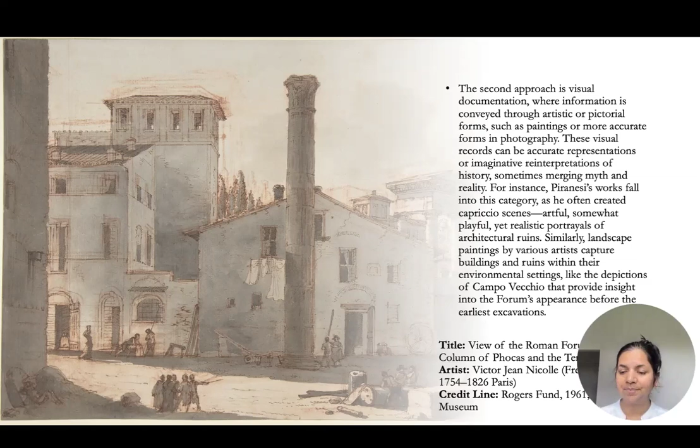The third form, and the form that actually is relevant in our case of work, is documentation and a focus on the work that is architectural drawings, a tradition that flourished from the Renaissance through 18th and 19th century. During these periods, many architects traveled, for example, to Rome, and as part of their training, visited sites like the Roman Forum to study ancient ruins.

By closely examining these monumental structures, architects gained insight into the assembly, form, proportion, and composition of temples, and often significant buildings from antiquity. This knowledge was essential as there was limited material available beyond Vitruvian treatises to examine and guide architects on the principles of ancient design.

So basically, what they would do is they would try and get a copy of Vitruvian work. They would examine and understand the proportions of study that were done during this time, and then they would actually produce them in the form of line drawings that were capturing on site the information that was to be collected.

And so what it did was it trained the eye with proportional composition that was written in the theoretical text of Vitruvius. So Vitruvius formed the earlier basis of how proportions need to be examined, and then architectural line drawings created the understanding of how these proportions were actually articulated within building design. And the combination of these two allowed for a much better understanding of how measure drawing worked.

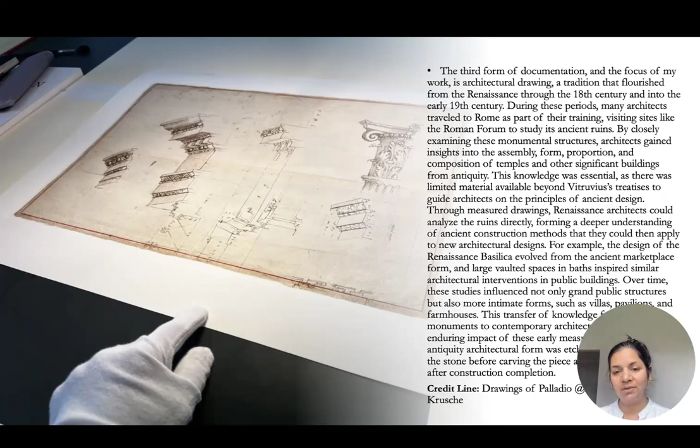Now I'm going to briefly describe Dharma Lab, which is basically digital documentation of World Heritage Sites. It was established in 2006 with the goal of digitally documenting World Heritage Sites, with the intent of helping the conservation efforts record their current state and generate new insights into their condition and histories.

Dharma Lab specializes in revolutionizing the field of documentation, leveraging innovative methods to achieve unparalleled precision and depth. Founded in 2006, it has over 18 years of fine-grained detailed data with up to 1 millimeter accuracy, and it allows, for example, in the case of one of the projects, which is the Roman Forum, for huge amounts of new insights into the site than previously available.

Over recent years also, we filled a unique niche in pioneering approaches that combine large-scale surveying techniques and cutting-edge scanning technology, including some of the work that I will be presenting here. NASA's principal work has been applied to some of the efforts that Dharma is doing, for example, the use of some of the technologies that were used in the Mars rover mission. How does that work with documentation? Well, that's what we're going to find out today.

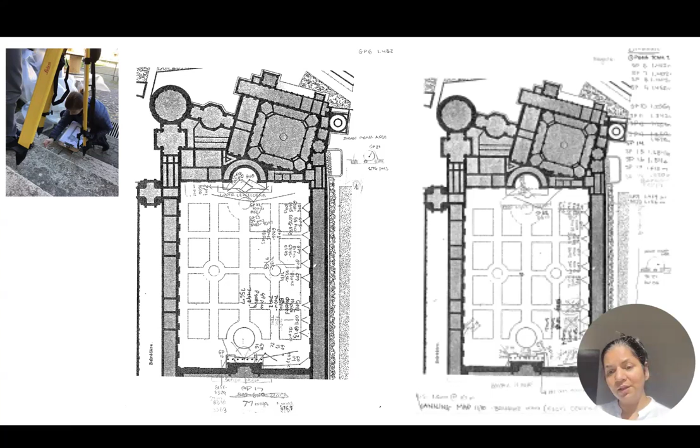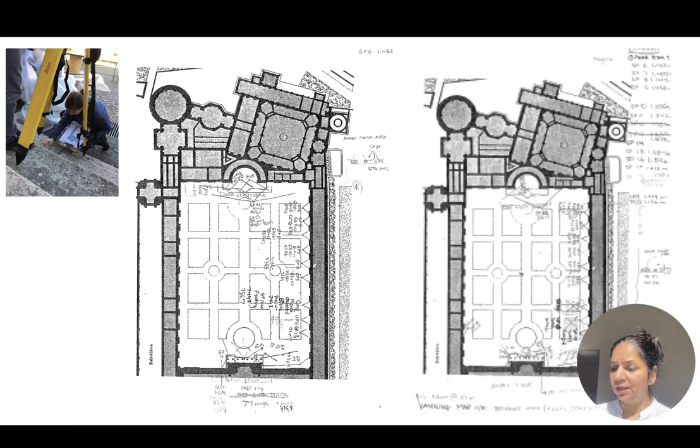Preliminary site visits are conducted to examine the terrain. So additionally, we also look into a preliminary site visit, at least one if possible, so one can get a sense of the terrain and visibility of specific monuments. For example, in the Forum project, this was an extremely difficult terrain, which is not the case in the Belvedere project, where the site is much more stable. And so at the Forum, we have to understand where we are going to place our instruments and what is the visibility between the terrain and the specific monuments on site to create a detailed survey.

Let's go to on-site work now. The on-site phase is the most intense and crucial period of the project. It requires a high level of coordination and ensuring that all team members have the necessary permissions to access the site. The site survey is conducted daily from sunrise to sunset over a period ranging from 10 to 30 days, depending on how big the terrain is and what needs to happen. It's typically the shortest period compared to the pre-site and off-site work, but it is most intensive in its manner of recording and information collecting.

The team is divided into groups. The survey is conducted by creating teams that are divided into groups working, according to the pre-site planning, on which instruments and what locations. Each evening, the collected data in various forms is cataloged and saved into a database to ensure ease of post-processing and quality control.

So for example, here you can see we are looking at 5 different techniques that we use on site. On site, we examine the historic documentation that we have already brought with us, and on that, with trace paper, we create field notes. And then beyond that, we use 3 tools. One is photogrammetry, the other is gigapan technology, and the last one is 3D scanning.

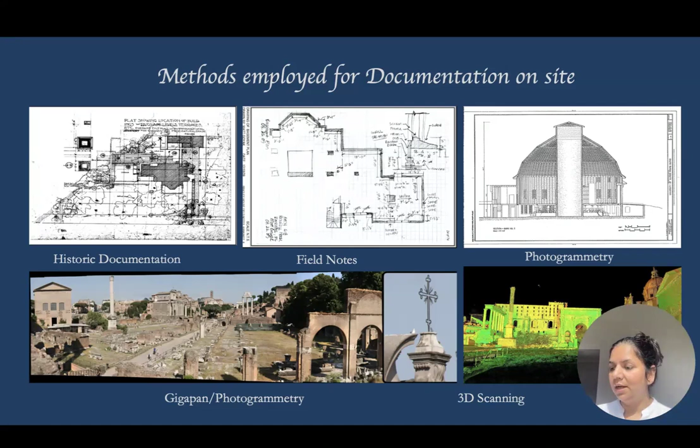The scans are typically made at a resolution of at least 1 centimeter by 1 centimeter accuracy. So let me explain to you what happens with the different tools that we take into consideration. This is, for example, 3D scanning technology used with 3D scanners. Today in the field, you have many commercial sellers that work on this technology and have raided the market with multiple different scanning techniques.

You can easily purchase a cheaper version of scanner in the field that doesn't have such a long span or long distance, and they are useful mostly for interiors or facades. But when it comes to large or long-range scanners, they are extremely helpful with high resolution. They are extremely helpful for monumental scale documentation.

For example, the use of the P40 and P30 from Leica was useful for the work we were doing in certain parts of the Forum and the Vatican. And previously, we've used all kinds of scanners from Leica to be able to examine and understand which scanner performed better. Beyond that, there is also something called LiDAR technology.

It's the same as the scanners, except you're now either using a drone or an airplane, and you're doing the same thing. You're measuring the distance with laser scanning to understand and survey a much larger topographical site, for example, urbanscapes and cities. Both of these techniques are essentially very helpful to get 3D coordinates.

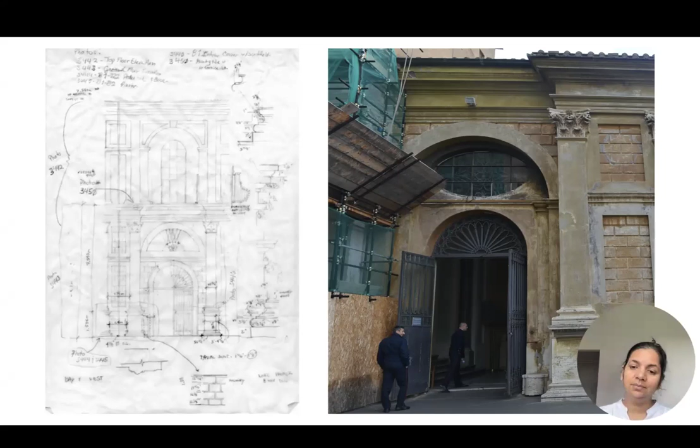So this is one of the bays at the Belvedere in the Vatican, and you can see there are lots of detailed field notes that have been taken here that help us understand what type of material was used, what type of concerns are visible on the site, what details are seen in the form of molding profiles, and the material, plaster or stucco, or any other information that needs to be collected about that site.

Typically, this is also a great place where you record information regarding water damage on the site, or any concerns related to how the structure is behaving or the performance of the structure and so on. Again, depending on the kind of documentation you are doing, these get supplemented with a lot more detailed records. For example, if you're doing a structural study of the site, there would be an FEM model associated with the structure. So this is just a preview of what you see and examine on the site itself.

And then finally, in the case of some of the work we have done in recent years, for example in the Forum, is hand measured drawing, where we basically take measured drawings of the site. Now you will ask, why do you take measured drawings when you've already collected the scan data? The scan data should be able to give you everything you need. It's not true. When it comes to detailed information about individual pieces of monuments, there is a lot of information that can get lost in technical data. And so we always back up our knowledge with hand measured drawing.

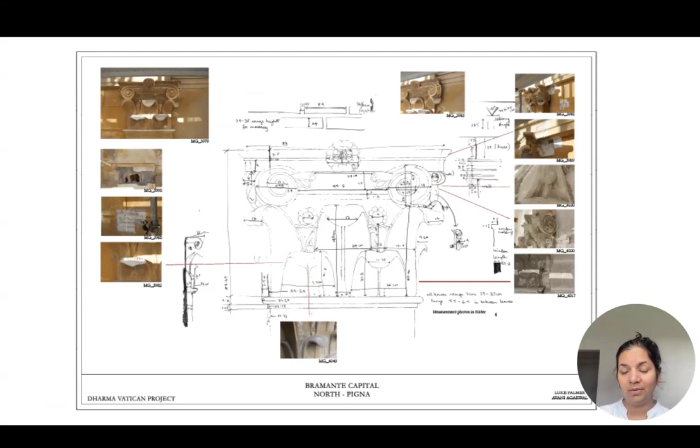If not, we try and collect at least general profile images that allow us to go back and concentrate on some of these details when we go back for post-processing of the information. Here you can see another of those detailed scale drawings that have been done on site.

The last piece, last but not the least, is post-processing. The post-processing part is generally pretty extensive. So, for example, the post-processing phase involves processing the collected data over months and years to create multiple deliverables. Based on the results, further expeditions are planned to gather additional evidence about the specific parts of the survey that require further evaluation.

This phase also includes transformation of the raw information, drawings, and field notes collected on site into final outputs and deliverables. The post-site phase is the most extensive, and it integrates and analyzes all the information from the previous phases to produce collective, comprehensive results. Multiple expeditions over time can be combined to create one large model where possible to allow for a more comprehensive understanding of the site.

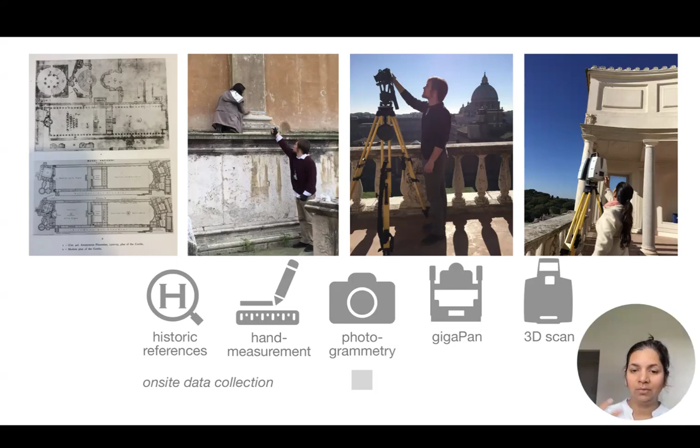So now with the kind of work that we did with pre-site and on-site information, we put this overall understanding in one common form. For example, here you will see the patented technology that we use in Dharma that combines the efforts done by the Center of Research Computing, the work of 3D scanning plus image recognition, putting a 3D model and a 2D image into something that acts as a comprehensive whole.

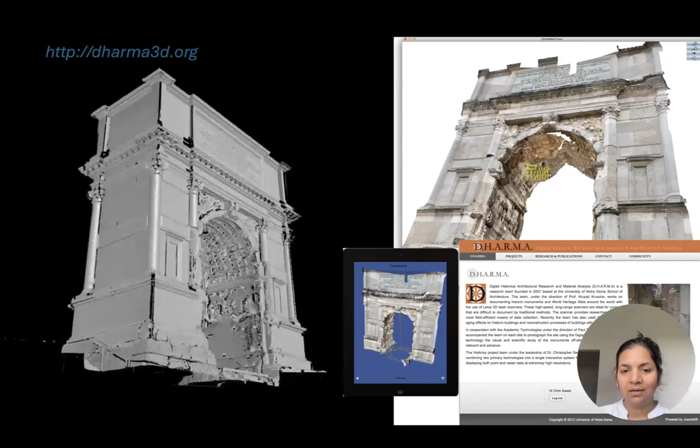This is the Arch of Titus, and the Arch of Titus has been documented in a 3D scan here in extremely high resolution. And then the photographic image applied on top of it allows for the image to be very well connected to both the scan itself and the image information. Now, what that does is it allows a better understanding and a visual referencing of the 3D information that has been collected.

The other forms of information that get delivered, for example, are line drawings and watercolor drawings. Now, you'll say, why do we need these? But in reality, most of the archaeologists and architects that are on site actually appreciate many of these drawings coming to them because they are able to use them and refer to them for multiple purposes.

Very often, I have seen that while 3D models are extremely visually appealing, they are difficult for non-specialists to work with. And so deliverables include creating a full set of measured drawings for the people on site so that they are able to utilize those for purposes related to the actual conservation effort that they are doing.

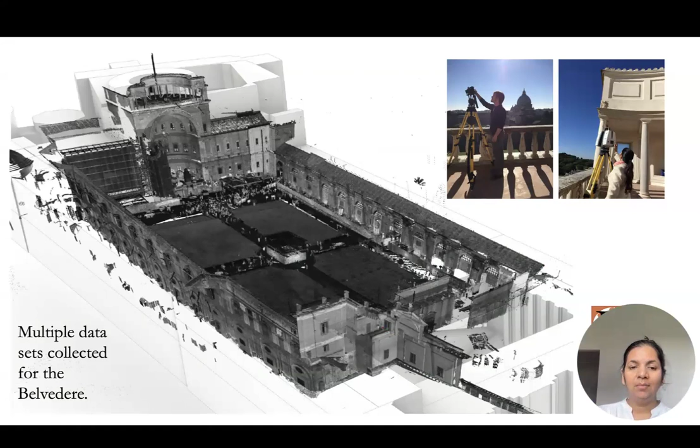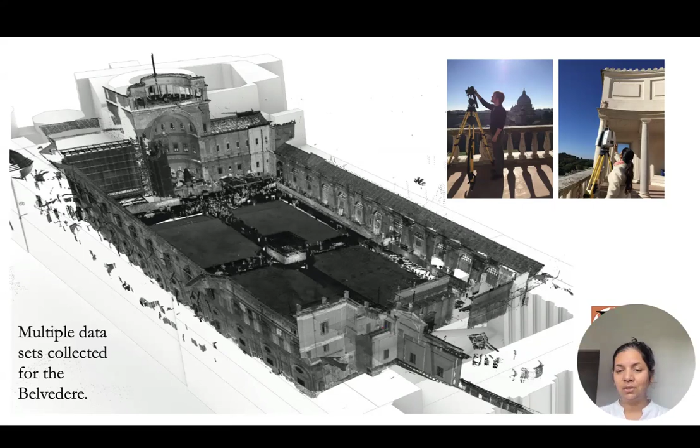Here, for example, you can see the Vatican data for the Belvedere that has been put together. You can also see that these are multiple scans that have been provided, and we are combining that with a Rhino model to allow for it to be visualized with an understanding of how this would be transformed. This is Margaret Zhang's effort, in which she's trying to combine these two techniques to allow for better visualization of the actual scan data that was produced on site.

We also take the scan data, the gigapan imagery, and then start creating specific information at different scales for the line drawings. For example, depending on the scale at which information is needed, we can have large scale drawings, monument drawings, and even detailed drawings.

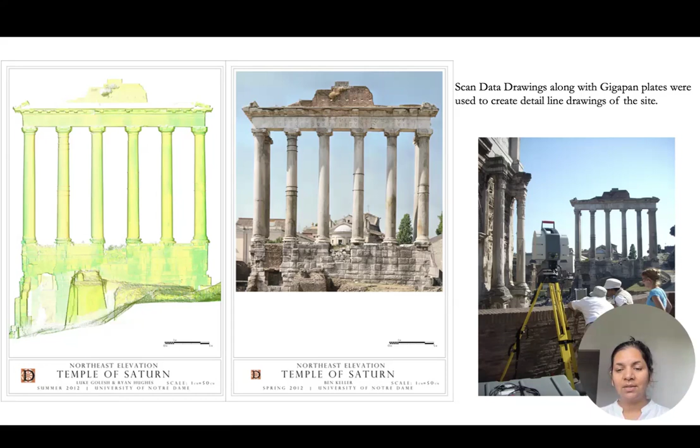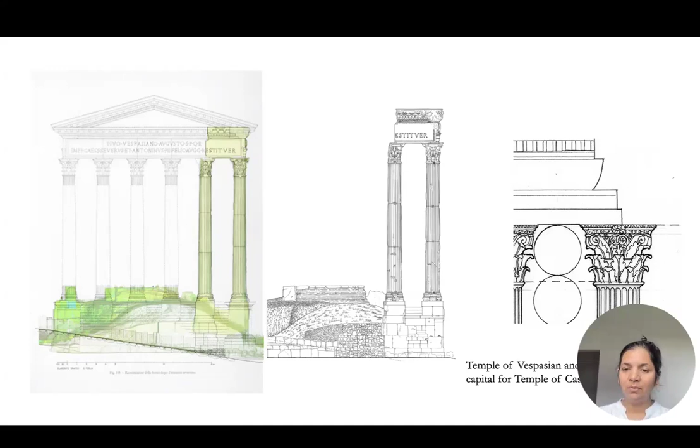Now, this is where you start getting into a variety of resolutions of information, and thus the production of, in this case, how the material on site is behaving, what kind of preservation efforts would be needed, and also architectural drawings that allow for it to be visible in a manner that is not a ruin, but moreover that of an actual architectural elevation.

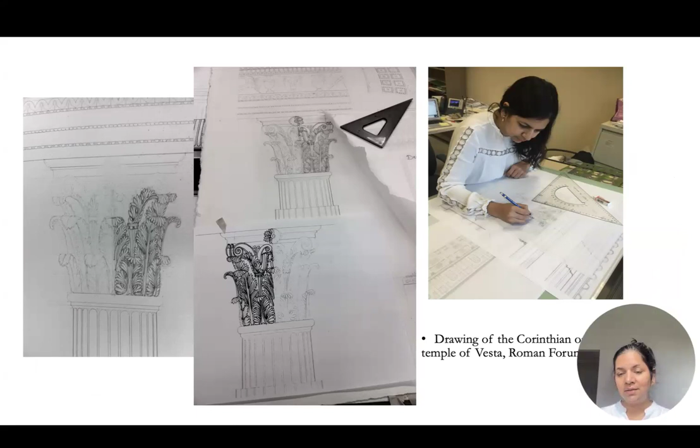Here you can see these line drawings are produced through a combined sense of information that is from on-site and also knowledge that has been gained through the classical study that is utilized at Notre Dame. So the team has a good understanding of what the language entails.

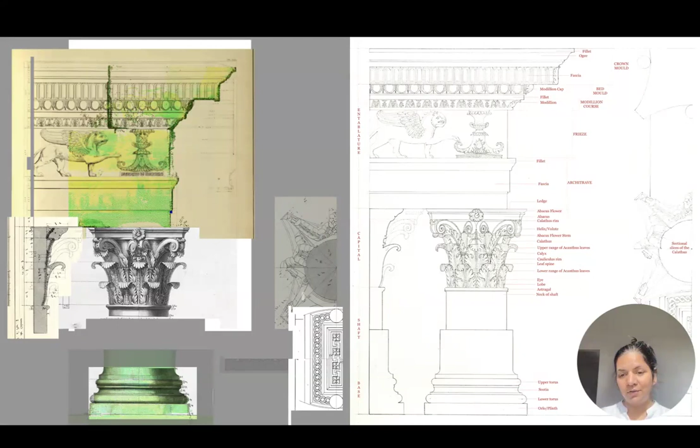Here is the capital and the order of the Temple of Faustina, and you can see that there is scan data, and then there are visual references taken from measured drawings done by different scholars from different time periods, all being collected and put together to create the final set of drawings that was created for the Temple of Faustina.

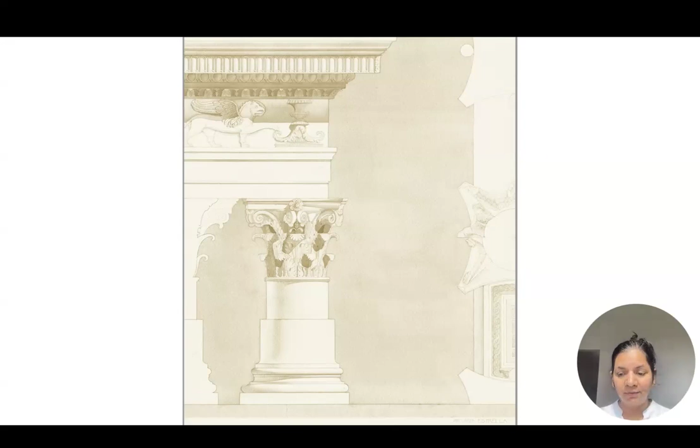These are meticulously hand-painted and need an extreme amount of time, but what that creates is these exemplary drawings that bring us back to the time of technique of the old plates. So it allows us to have drawings that give us knowledge about how the site would have been architecturally when it was initially created and composed, and allows understanding from the ruins and deciphering what the temple truly wants to share.

Beyond that, we have multiple other key outputs that are created. These include scholarly articles and a lot of software and hardware outputs. So, for example, you're going to see now a complex way in which we are putting data sets together. And what that allows us to do is to create extremely low resolution phone applications and apps, and extremely high resolution images, or visual transformation of the site as we can see things evolve for the future.

So when you talk about where we are today and where the future lies, documentation is evolving at a very high pace. And when you think about new technology, how can we create documentation as a source for 3D visualization of information? So let me give you an example.

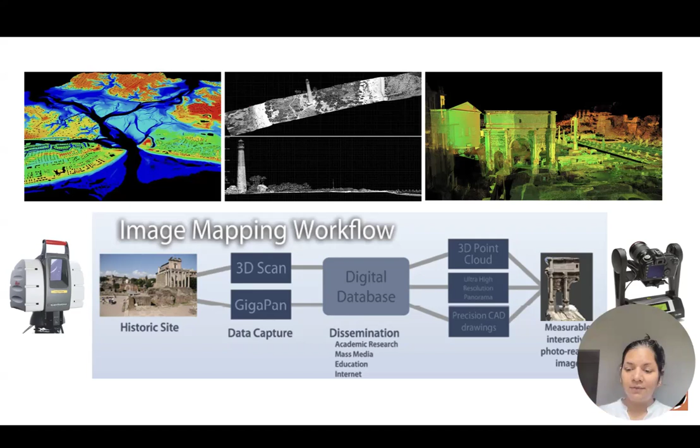If you're looking at the forum data, if we are able to achieve this in the most systematic way, you're able to understand a colossal site, which is close to 800 meters to a kilometer in range, and you're still able to zoom in and examine the minutest detail about that site at the same time. Now, that is the evolution of digital understanding of the site for the future. And you're able to, at the same time, produce terrain information that allows you to examine the transformation of the terrain over this large scale or scope of the site.

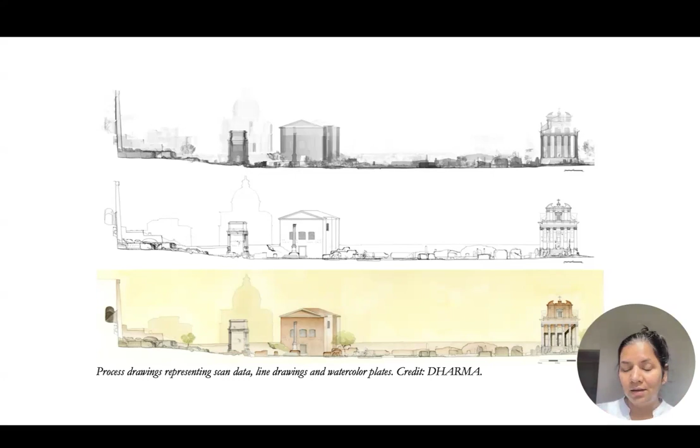So remember, I was talking about how small the scale of the human being is in front of the base of one of these monuments. Now think about that base being right here, and then scale the whole site and see the scope of how big this whole site is, and how we are able to document at this colossal scale and at the same time make it available in different ranges and methodologies to allow for examining this site in a variety of ways.

And our ultimate goal is to find ways in which these outputs allow us to examine the site with library information, books, and other digital data sets, so that when you go to any of these web interfaces or portals, you're able to work with the 3D model, zoom in, zoom out, and then tag photographs, images, articles, and so on. So it becomes a comprehensive repository of digital data sets. So you're taking a simple intent of measuring, creating a measured drawing, to in the end getting a full comprehensive knowledge about the site as far as you can.

I'm going to show you two demonstrations to end this talk. The first one is the mobile app that we have in the Apple interface. You can look up just Roman Forum and you should be able to download this app. It's free. And the second one is the 3D visualization that is available on our web portal, and how that works. That demonstration will be given by one of our team members, Chase Brown, and his brother Chad Brown. Chase Brown is the one who's going to be speaking, but the whole visualization team was working on that. So let me begin with the CRC created app.

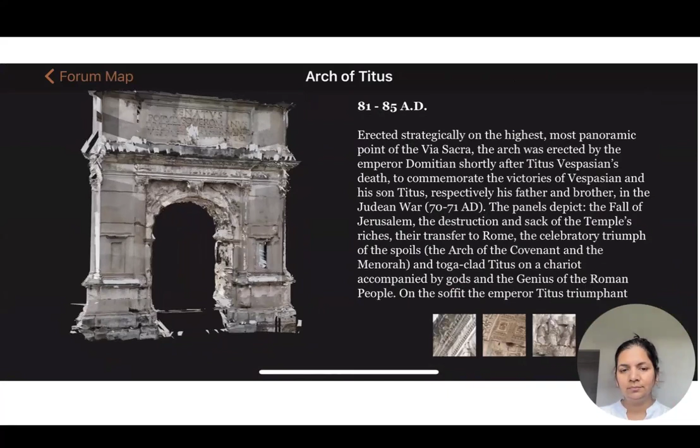You can also click on the pictures that have been identified on the corner, and these images, when clicked, are showing high resolution photography that was done on the site. Upon further zooming in, one can actually see the way the stonework was sculpted and carved out, and these details, the way they are existing today, in ways in which they inform how the patina has grown, how it has over time created a new knowledge on the construction techniques that were utilized, all can be visible through these images plus detailed models on the site.

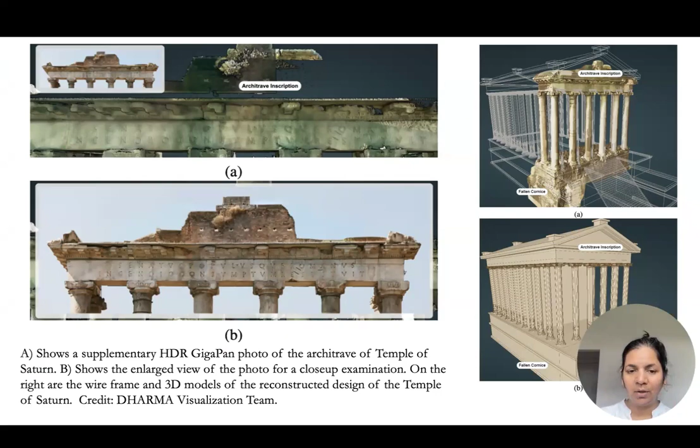And here is the visual data set that we are talking about in a few seconds by the Dharma visualization team, examining the monuments on a web interface.

Hello, my name is Chase Brown. On behalf of the University of Notre Dame School of Engineering, Department of Computer Science, and the Dharma Lab in the School of Architecture, I would like to demonstrate visualizing digital architectural data for heritage education.

Here you can see three monuments: the Temple of Saturn, Temple of Vespasian and Titus, and the Arch of Septimius Severus. I'm able to navigate freely through this lesson space. I have a toolbar on the top left, which gives me the ability to switch between the mesh, reconstructed, and point cloud data sets. I have some tools to do measurements and view coordinates at a point. However, these are predominantly precursor tools to future work. We also have a lesson selector and three buttons to change the quality of point cloud data being rendered.

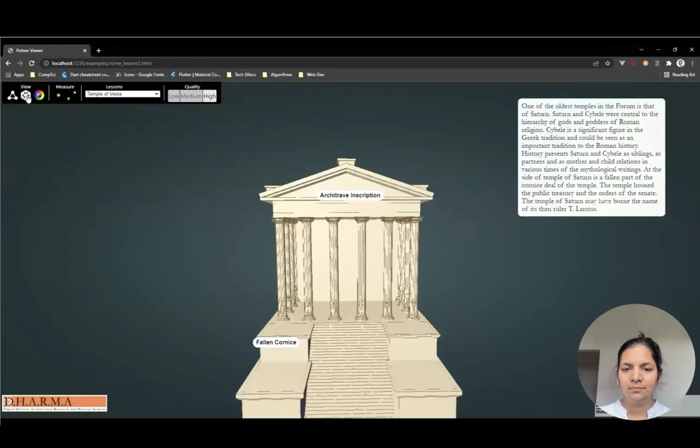As you can see, the user can interact with these annotations, which will orient them on the indicated monument. Hierarchical annotations and text boxes will then appear. From here, we're able to change the format of the data. Here, you can see the 3D reconstructed model. And here, you can see the reconstructed mesh that was created from the point cloud data. We're free to overlap these models as much as we'd like. And at any time, we can return to the original point cloud data.

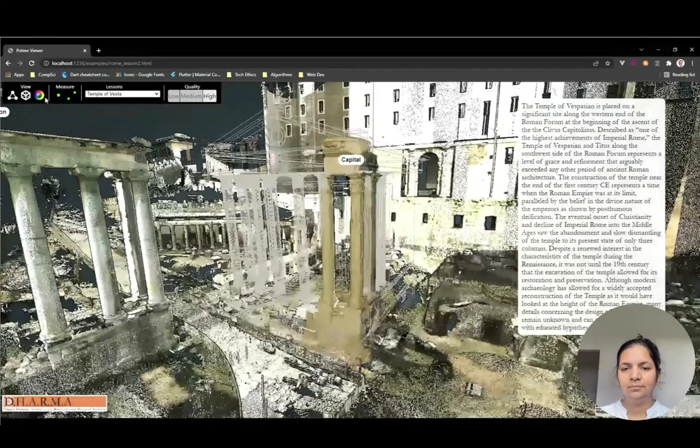Clicking on the children annotations, we see images pop up to give us a clear understanding of details on the monuments. From here, we'll go ahead and look at some of the other monuments. Something I want to point out is the outlines generated around the mesh model are from the reconstructed models. We simply took the edge geometries and overlapped them with the mesh. This is to help the user visualize what the monument once looked like when it was completely standing.